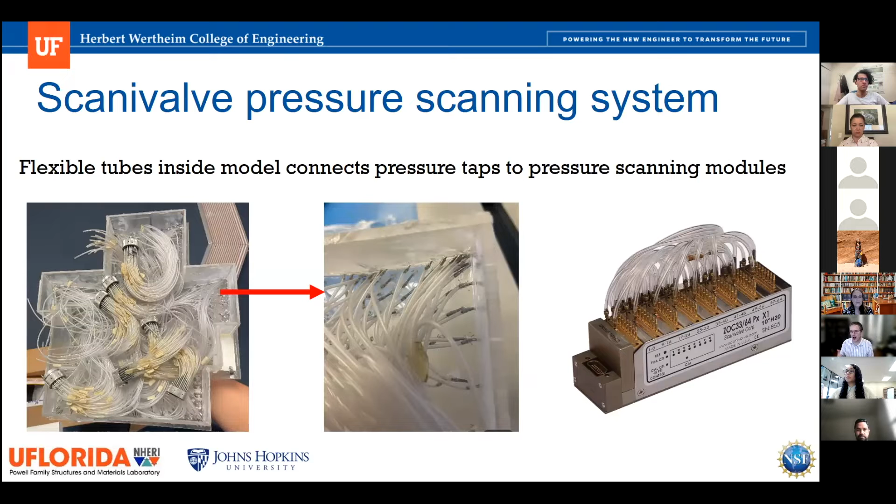There's 512 different taps all coming down to these metal connectors, and all those metal connectors connect into the device on the far right, which is a Scanivalve system connected to a series of pressure transducers, which cycle through. So while we're actually running an experiment, each one of those little holes on the roof of my model are sampling the instantaneous pressure it's feeling right at that spot, at 512 different spots on the model. And that's where those color contours come from, for example.

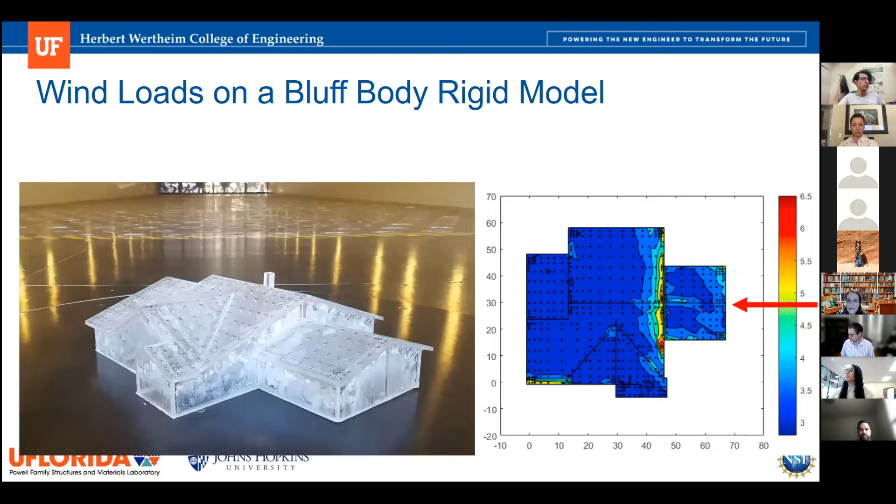So the motivation here is we want to determine the influence of higher order characteristics of the approach turbulence on the peak wind loads.

And so here's your first opportunity to give me some feedback or your opinions. And if you really know what the answer is, maybe give someone else a chance who's guessing.

A traditional boundary layer wind tunnel experiment, which is the backbone of what we're doing, typically starts by dictating what the first order and second order characteristics are of the approach wind field. What I mean by first order is just the mean wind speed, and then the coefficient of variation - standard deviation divided by the mean. In wind engineering, we want to be special, so we gave that a different name: we call it turbulence intensity. Turbulence intensity is just the coefficient of variation of the fluctuating wind as it's approaching.

Now we're going to control the nature of that turbulence and the mean by controlling these little elements.

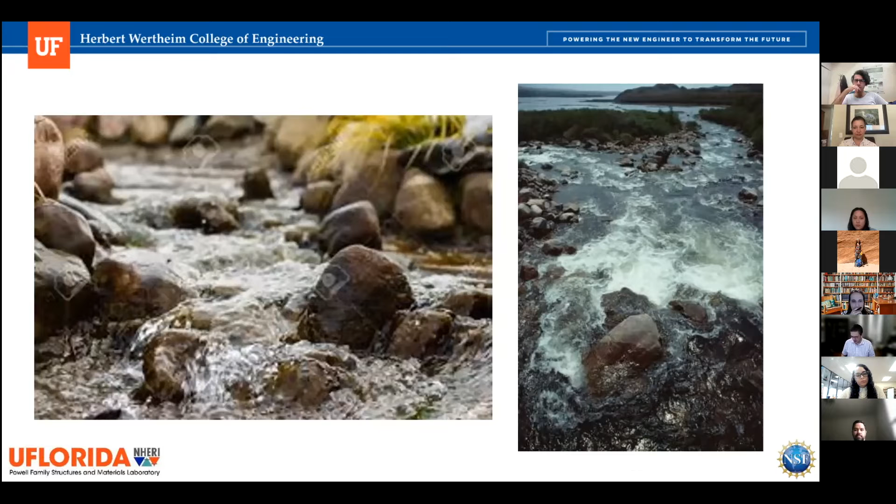Now very gently place a few boulders in the stream and imagine what's going to happen. You're going to get turbulence because the fluid has to move around the boulders, and that generates what's called mechanical turbulence. Well, the wind tunnel is just throwing rocks in a stream.

It's generating mechanical turbulence, and if this movie works, you'll see what I mean. It's a time-lapsed video. All the rocks in the stream are the little rectangles you see on the floor. If we make them higher, it's putting in big boulders. If we make them lower, it's putting in small boulders. That controls how much turbulence we're generating.

But we need to measure the wind speed at lots of different places. So the probes are fixed for 30 seconds, take measurements, then they move a couple of millimeters, then they move again, over and over. So that's what this time lapse is going to be showing. Hopefully you guys will see something other than weird.

In reality, every one of these series of experiments takes about 20 minutes, as opposed to the few seconds we're looking at here.

This high level of automation that you see, our ability to push a button and change all the rocks in the stream, is a big enabler for what we're trying to discover.

Oh, there's Ryan, our technician. He always has to get in the picture.

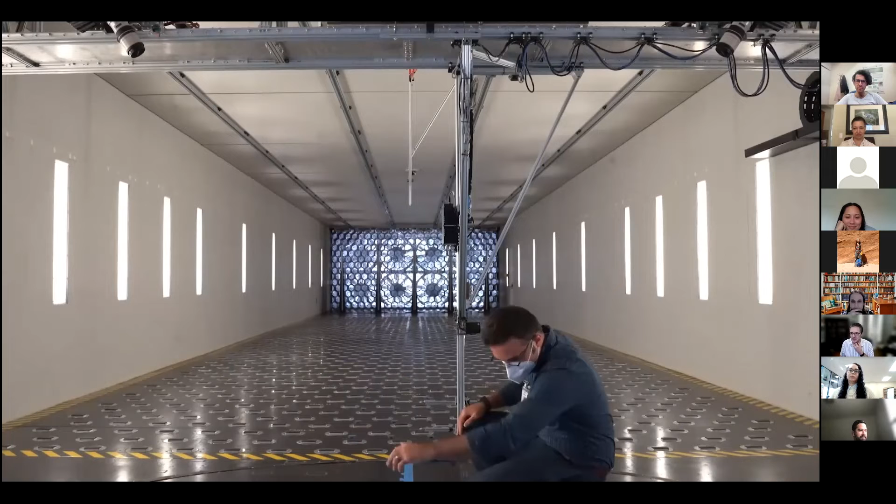What we're trying to discover is enabled a lot by our ability to do this rapidly. This is how most wind tunnels operate already - they put rocks in the stream, but they get on their hands and knees and move the blocks around themselves. So if we can go from one setup to the next in less than 90 seconds instead of a few days, that's a huge upturn in scientific discovery output potential.

Okay, so moving on. Here's the same figure as before. The wind speed - hopefully you can figure this out - the average wind speed is going to increase as you go higher up because it's sticking to the floor, so to speak.

But the turbulence reduces as you go higher up, because the turbulence is most extreme down near where the elements are. As you get farther and farther up, away from those roughness elements, the turbulence decreases.

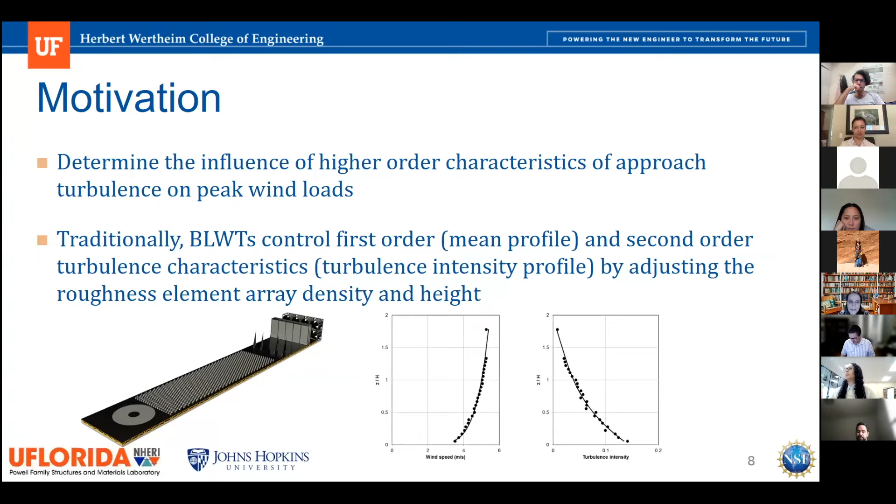Okay, so here's what we're trying to do. We're moving from just describing the approaching wind field to the nature of the pressure that's now being felt on the surface of the building. So we've got our model, and the two things we're controlling in the wind tunnel are the turbulence intensity and the mean profile, and we do that by moving the rocks in the stream, as we just showed.

This is the magic number that all wind people focus on - this is a non-dimensional thing called a pressure coefficient. You can think of it as a filter that translates wind speed into wind pressure. We just take P, which is what's actually being measured on the surface by that red dot. The P reference is the weight of the atmosphere sitting on top of us right now.

And then the 1/2 rho V squared, rho is the density of air, V is the reference velocity. That means we pick some height in the wind tunnel and measure the mean wind speed at that height. That becomes the reference velocity. If we're using ASCE 7 to do a design load, that reference height is usually 10 meters as a frame of reference.

Now, that pressure coefficient, once we take the raw pressure and process it through that equation, we now have a time history of pressure. You can see it's negative, which means relative to the atmospheric pressure, it's pulling up on the roof as opposed to pushing down on the roof, because of separation happening over the roof.

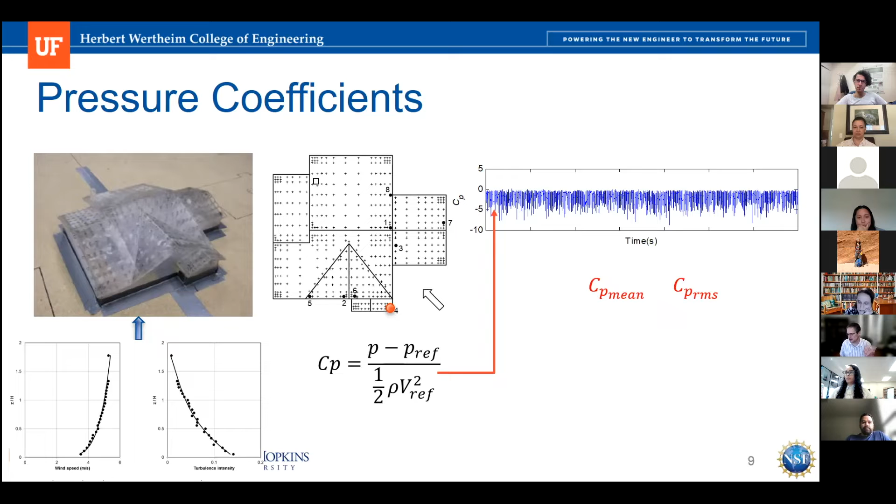And of course, those answers are going to be a function of the building shape, the wind direction, and the profiles, meaning the nature of the approaching turbulence. So this time history would change its nature if I went and rearranged all the rocks in the stream and repeated the same experiment on the same building.

All right, so different wind tunnel facilities—we're still drilling down to the motivation—different wind tunnel facilities testing the same model, and we've done this lots of times in different studies, do a good job of matching the first and second order pressure coefficients if they use the same target profiles. That means if two different wind tunnels produce the same first and second order approach flow, when they measure the mean and second order pressure on the same model, they get pretty much the same answers, which is a good thing. We want consistency.

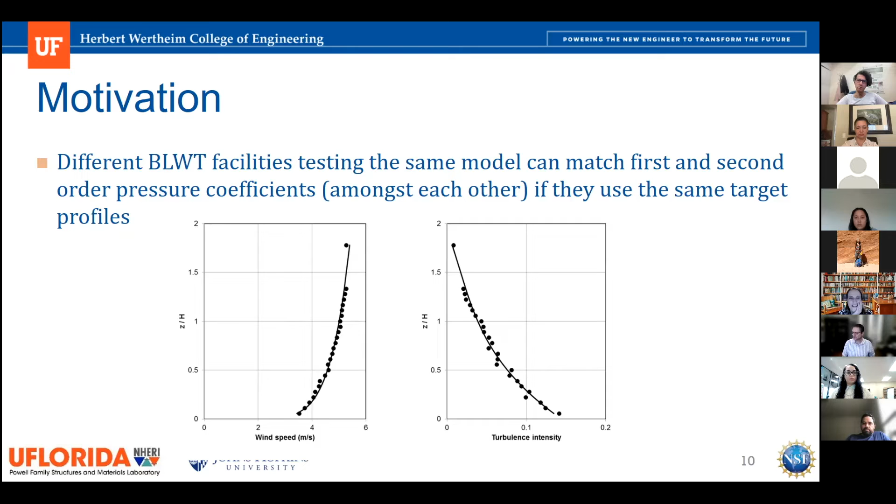The peak pressures, which I'll illustrate in a second, used for design—so the stuff that actually shows up in the codes—is actually a peak pressure from extreme value analysis, and it's not the things that we just looked at. These peak pressures are also a function of the approach turbulence, the building shape, and the wind direction.

When we look at what different wind tunnel facilities measure in terms of peaks, there's a great deal more variability between different facilities trying to duplicate the exact same thing. And so this causes a lot of uncertainty. If we happen to use wind tunnel A to inform the wind load provisions, but wind tunnel B would have gotten a different answer, then that's an unclosed gap, right?

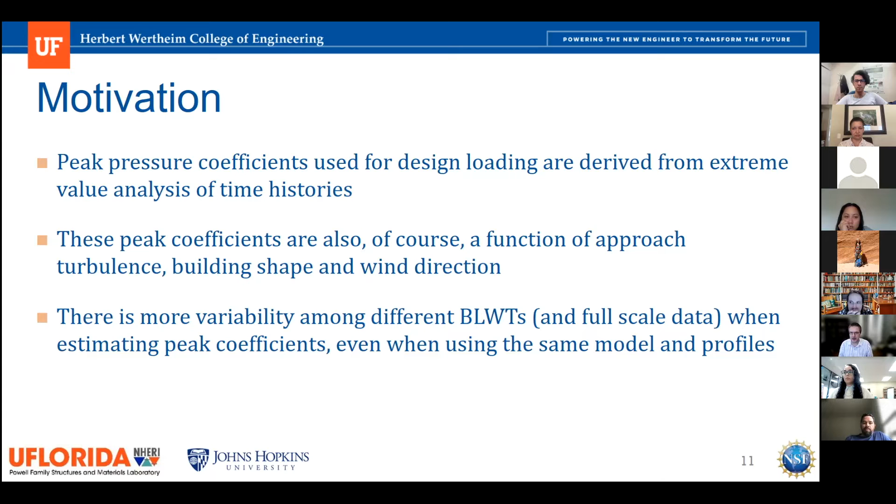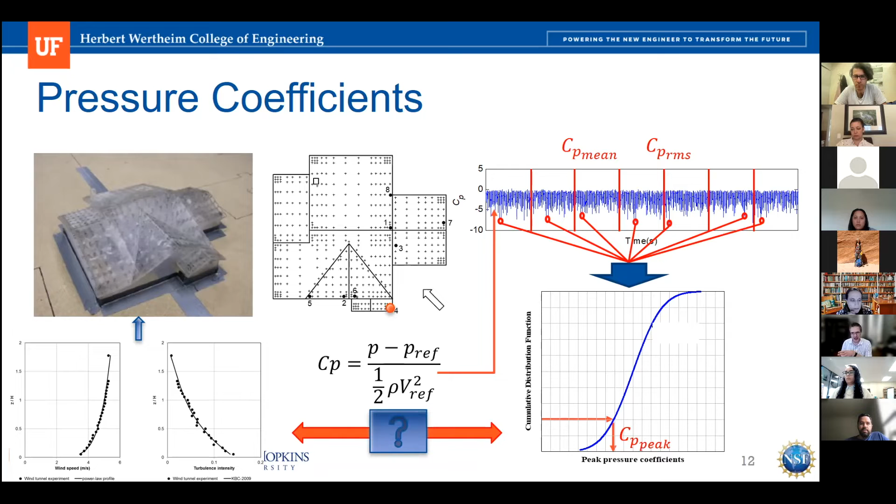So this peak is also a function of what we initially tell the wind tunnel we want, how we rearrange the rocks in the stream. But we suspect that's not the whole story, and that's what we're trying to explore here. Is that enough? Just defining the mean and the second order profiles, which any wind tunnel can do—is that enough to get a consistent set of peaks?

So here's the motivation again: is it possible that the peak differences between different facilities that have the same first and second order profiles arise because they might have different higher order turbulence approaching the model, since no one really measures that because it's a very difficult thing to control. So wind tunnel modeling of higher order turbulence and its effect on structural loads and response is what this research project is about. Higher order just means, if you've taken a statistics class and talked about mean and standard deviation or coefficient of variation, now we go to skewness and kurtosis.

Third central moment, fourth central moment. That's what we're talking about when I say higher moments, nothing too complicated.

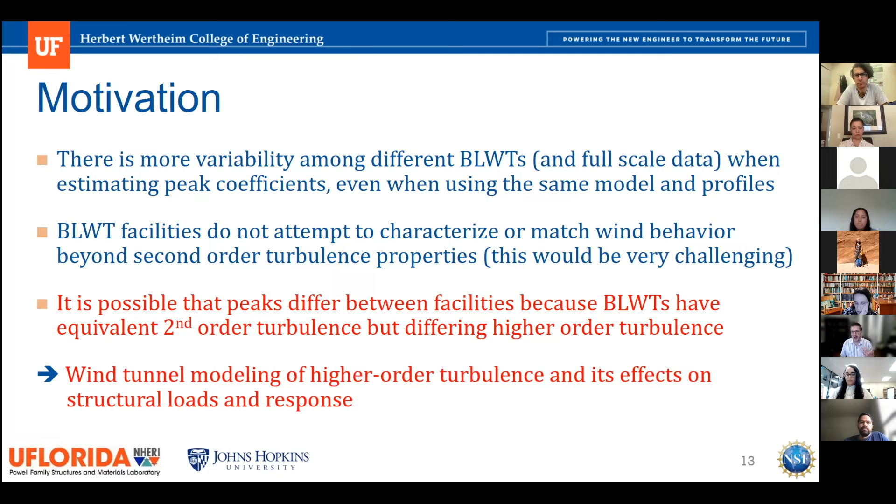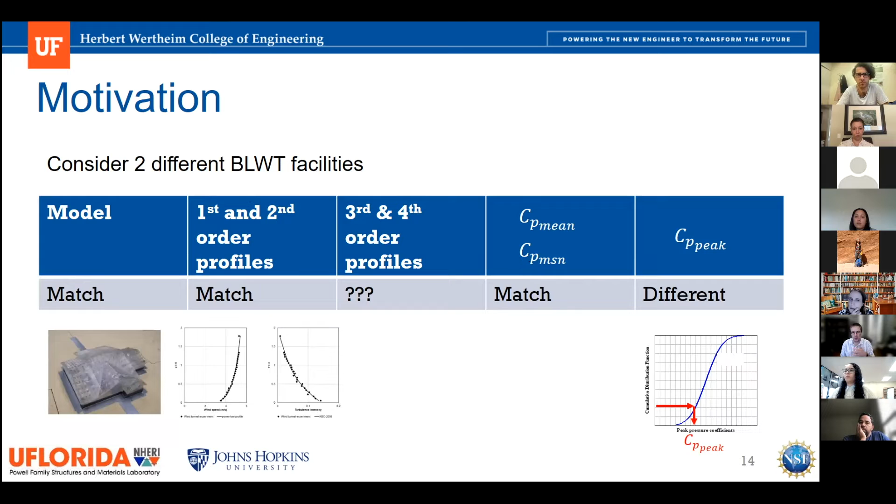So again, in a picture, here's what's going on. We've got two different boundary layer wind tunnel facilities. We give them the same model. Both facilities match the first and second order profiles. We don't know if their third and fourth order profiles are the same, because they don't even measure them or report them. They're able to match the first and second order pressure coefficients that result on the model, but they get different peak pressure coefficients oftentimes. So we think this here is the gap that we need to explore, whether that's the missing link as to why we get different peak results from different wind tunnels.

So if I told that story on the first page or first two pages of a proposal, you don't need to know anything about wind engineering to know, oh, I get why they're doing this. I see where the gap is. This could be important. Let's read more and pay more attention.

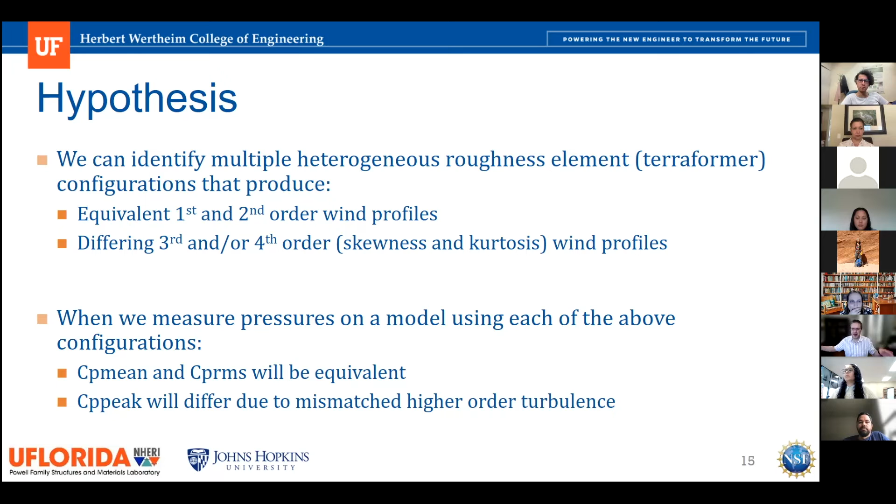So, hypothesis: we can identify multiple heterogeneous roughness element terraformer configurations. That is to say, we can rearrange the rocks in the stream in lots of different ways and still get the same first and second order profiles, equivalent profiles. But maybe the third and fourth profiles would be different for different arrangements of rocks. And when two different wind tunnel facilities both match the first and second order, they may not be matching the third and fourth orders, and that's why the differences come from.

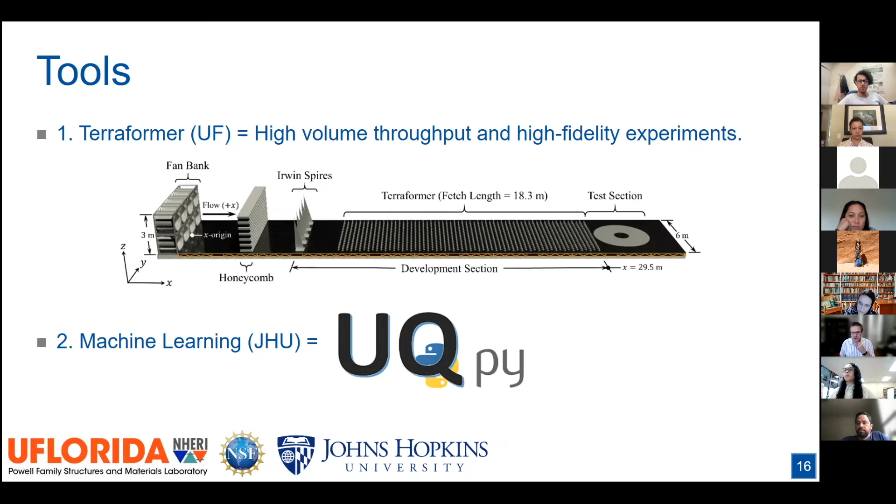And then we're also using, this is where the Johns Hopkins folks come in, machine learning to drastically reduce the number of experiments we have to do before we discover interesting things. And so here's the basic concept.

Since we have, it turns out, 1,116 individual rocks, each one of those elements, we have 62 rows of 18, I think it is. And every one of them can be individually controlled. That means we have more than 1,100 degrees of freedom. So we have to be careful and parameterize our space.

What we're going to do is start off by just using simple sine waves to describe the flow over the rock. The shape the rocks are going to make as we move from the fans to the test section is going to look like a sine wave. So we're looking at a side view here of what the terraformer looks like over 62 rows.

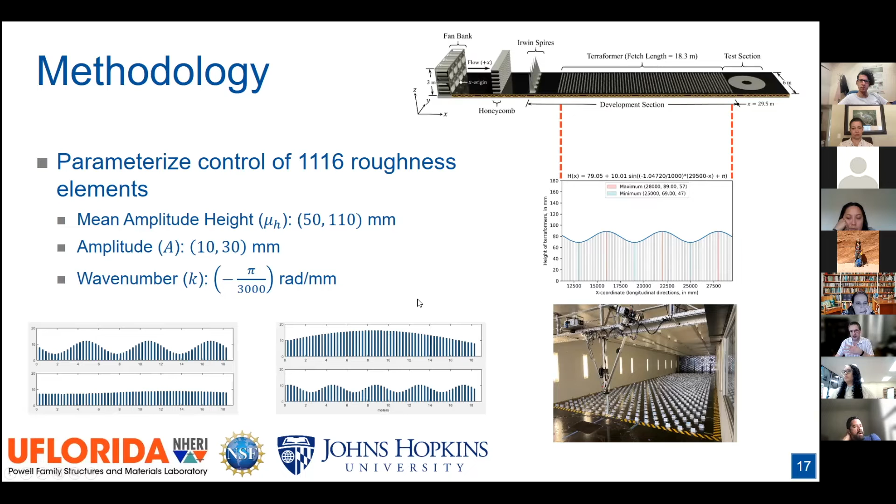And if it's a sine wave, that means we can parameterize it by the amplitude of that sine wave, and the wave number, another way of saying frequency. So we can have very fast moving, very slow moving, high amplitude, low amplitude variations of the sine wave. And that's what we're going to be doing to the terraformer, then measuring the approach turbulence that results from these different shapes. So we're systematically rearranging the rocks in the stream.

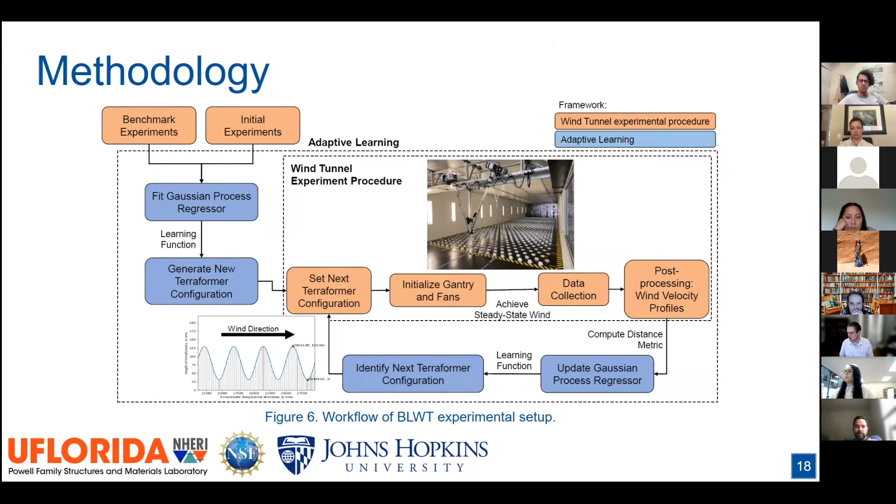I won't dwell on this one. I think we don't really need it, and I don't want to run over on time. It's really sort of a detailed look at the sequencing of when we do an experiment, when it gets fed into the machine learning, how the machine learning feeds back into the next experiment, and so on. But let's focus on the basics.

So first we have to start with a benchmark. The benchmark experiment is going to be every one of those elements set at exactly the same height, it happens to be 8 centimeters. So every one of them is going to be 8 centimeters off the ground, so it's a homogeneous terrain. Every element is the same height. And then we measure the turbulence intensity at the test section.

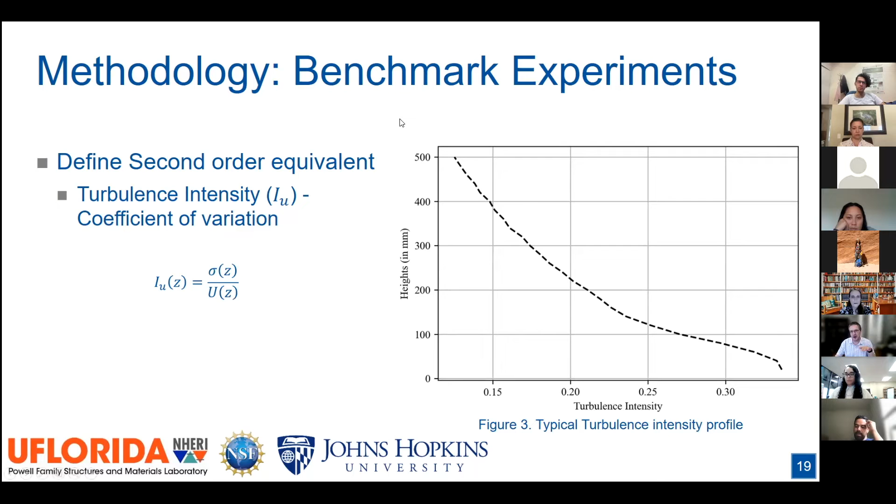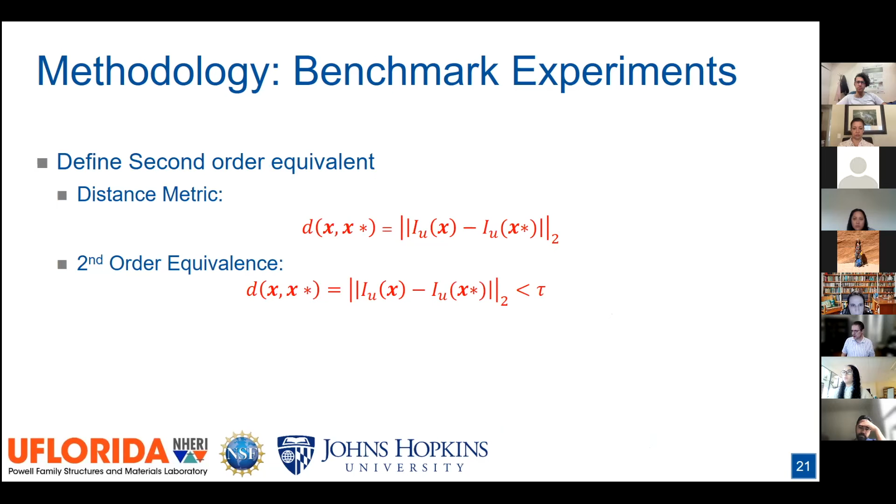If I was to draw another experiment on top of this one, and maybe it fluctuated away from the group a little bit, we can statistically quantify how much that fluctuation is and whether it's significant, and whether we could call that one equivalent or not. That's really what these two equations are talking about.

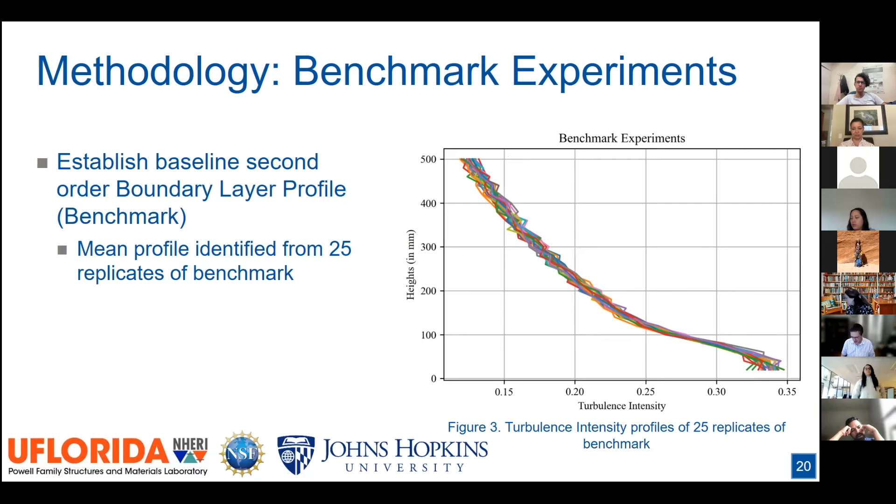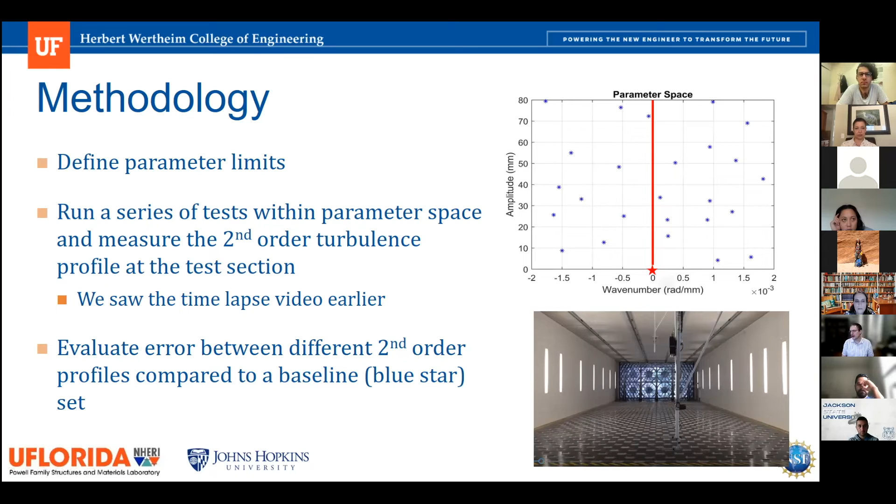Then that differential and the parameter space is what feeds the machine learning. So we feed those results from the initial 25 into the machine learning. I'm not getting into any details about how the machine learning works. You all know the basic idea of machine learning is a pattern recognition system.

The input is the terraformer shape, the sine wave, and the output is the error between the resulting second order profile and the benchmark. So the red dots that showed up in our parameter space are, for example, experiments that the machine learning told us to do.

The blue ones we picked randomly from our space. The red ones say the machine learning is telling us, I'll learn the most about this if you put an experiment there. And then it takes that result, feeds it into the collection of what it's got, and says, now I want you to go there, right?

And you can see it kind of—this is just a cartoonish illustration. I'll show you what the real surface looks like in a few slides, but I want you to get the general sense. So every red dot is now the machine learning telling us, do the next experiment there, there, there. And eventually we want them to figure out where to do the experiments to establish the contour.

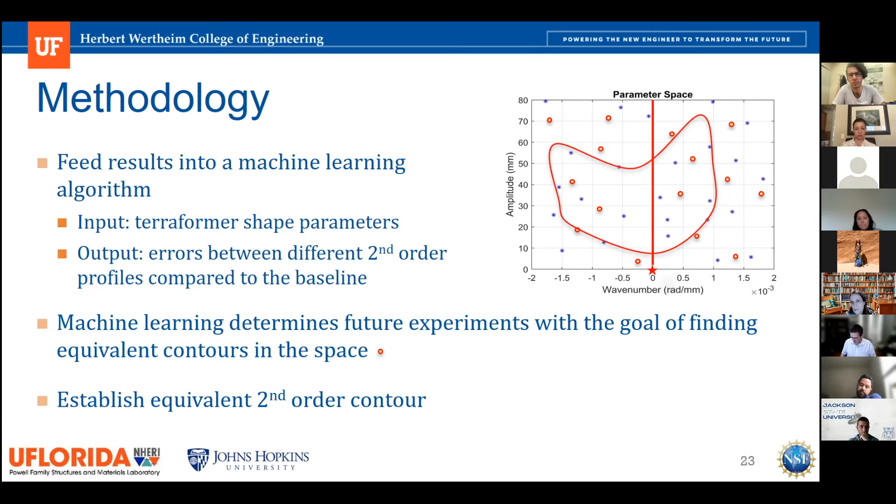So we expect that there will be a contour that everywhere inside that contour would be statistically equivalent to our benchmark experiment. We would call it the second order equivalent contour. And then I'll tell you about why that would be important as we get to the end.

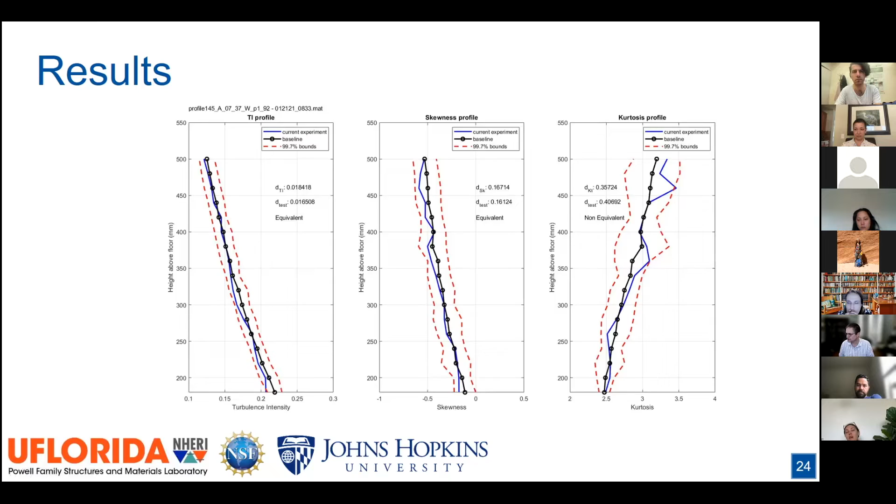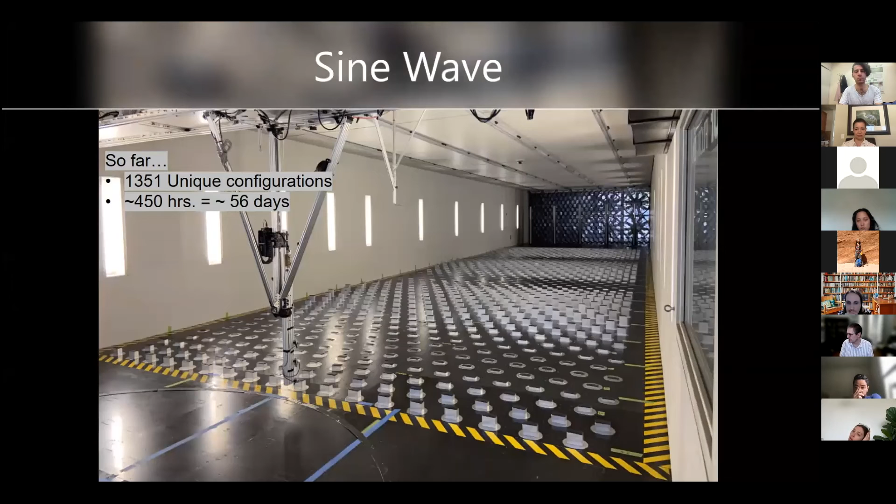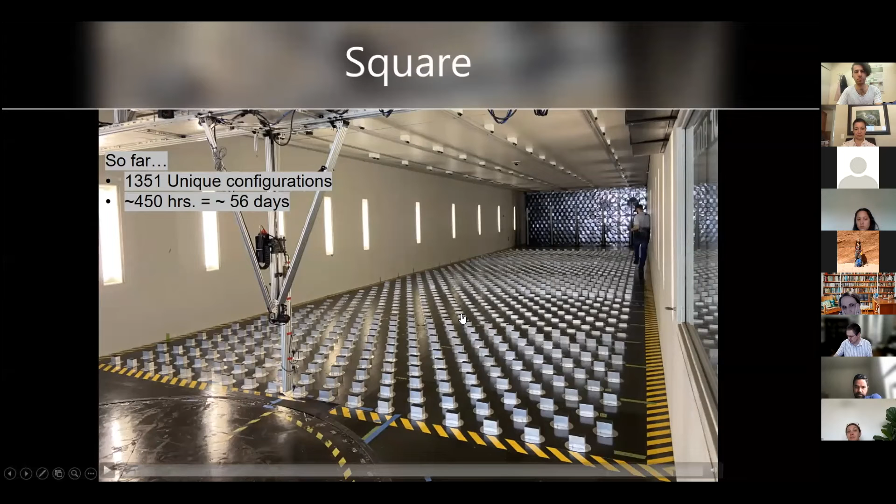Here's a cartoon of a number of different terraformer configurations that have been done, just to give you a sense of the variability. These are all different sine waves that have already been plugged in and tested, and we got a second order profile for each one. I showed you a handful, but we've done over 1,000 different configurations to date, lots and lots of high throughput that we wouldn't be able to do without the automation in the facility.

In terms of what we got out of machine learning, this was a result. This contour came from the 25 initial samples, the blue stars, and then the machine learning told us it was done after 197 individual experiments, each time reconfiguring the terraformer slightly.

This is our best estimate of how many experiments we would have had to do without machine learning. Without it, we would have just gridded the parameter space and started plugging away, brute forcing our way through. We could have gotten the same precision of the second order contour if we had done 2,200 experiments instead of less than 225. So machine learning in this case saved us an order of magnitude in effort.

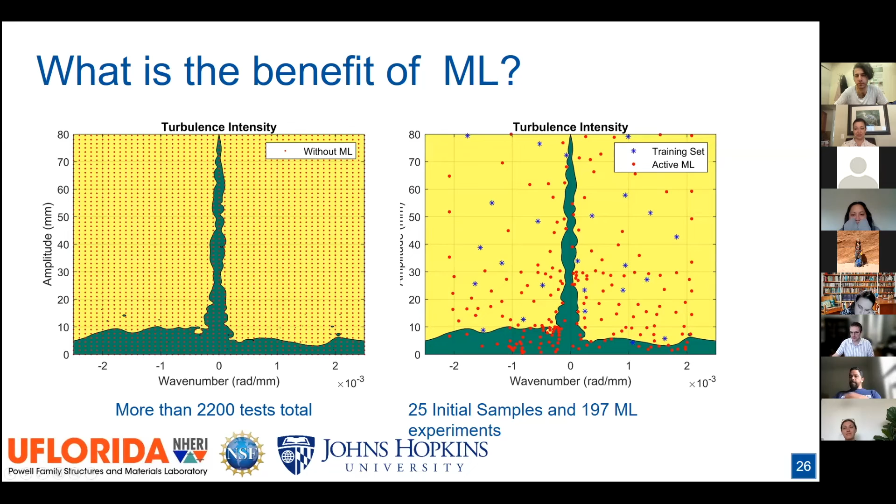So the guy at Johns Hopkins and his student, who know nothing about wind engineering, are driving the boat here, perhaps offering the most important thing. Here's where we're going next.

Going back to our model, you might have wondered what happened to that model, right? It's not in anything we've done so far. Now we're going to put this model in the wind tunnel and pick experiments. We'll pick experiments in the green zone, the second order equivalent zone, and make sure we cover it. We'll do lots of experiments.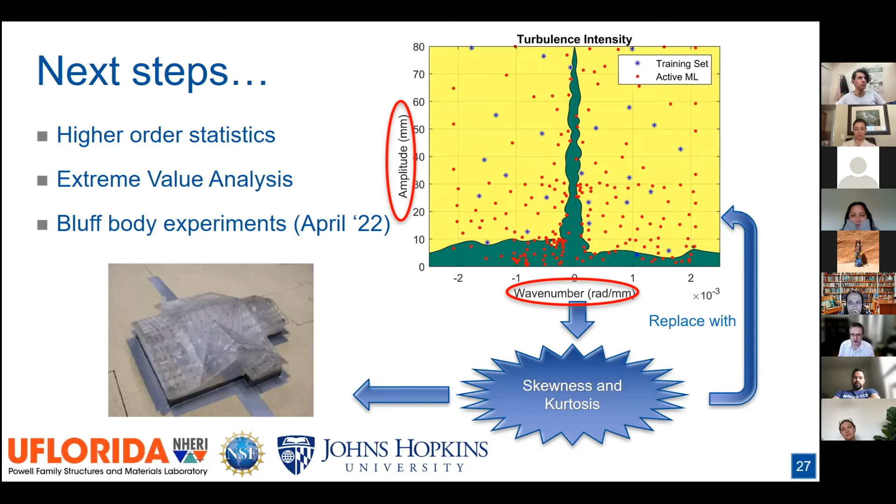Imagine any one of the red dots inside the green, we're now going to subject this model to that, and then measure the peak pressure coefficients. If our hypothesis holds up, we'll get different peak pressure coefficients, even though all the experiments have the same second order approach turbulence. As a reminder of what I mean by peak, you take all these peaks every so often, collect them, and define a probability of exceedance.

It's premature to say whether our hypothesis is valid, but if validated, it can be a significant contribution to wind engineering. To summarize: building code wind loads are based in part on peaks measured in boundary layer wind tunnels. Peaks are sensitive to higher order turbulence. Higher order turbulence is sensitive to roughness element configuration. Multiple roughness element configurations can be second order equivalent. Therefore, second order turbulence modeling in boundary layer wind tunnels is insufficient to resolve peak loads.

Those are not conclusions yet. Those would be the conclusions if our hypothesis is validated. If it's not, then we've discovered that it's a dead end and no one else has to pursue it. So either way, it's a win, and either way, it's going to be a paper that my students and I are going to write.